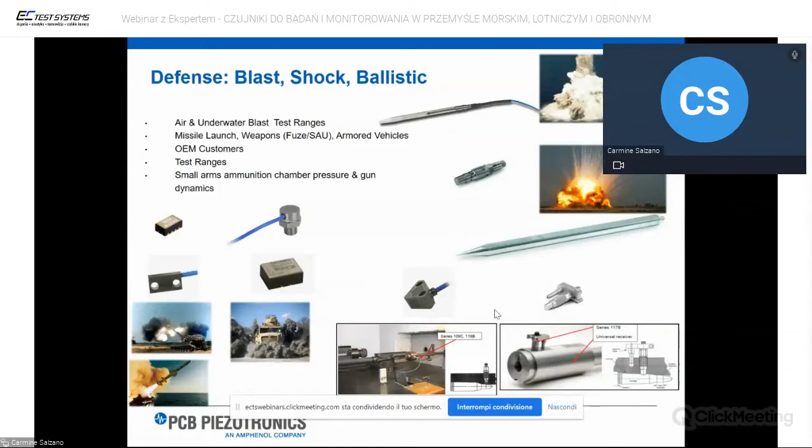Different applications in aerospace and defense. Today we'll focus on defense, especially underwater vibration and pressure sensor. In particular, defense shock applications are also related with shock and blast, where we use piezoresistive accelerometers for shock and pressure sensor also.

One of the parts of defense can be considered the Navy in terms of military vessels, but this is an overview of application that can be applicable also for civil naval vessels. We try to call them vessels in a very generic word because the application is very different, and I think we can divide into 2 parts: one sensor for testing, the other one sensor for monitoring.

The sensor for monitoring versus for testing is a very different application. Of course, these are just the applications we can serve with our sensor, not all types of application, as well as also the monitoring. These are a few monitoring applications we can serve with our sensor.

One particular application I would like to mention, because we will not treat it in the rest of the presentation, is comfort. Comfort is a typical test for passenger ships, like a large cruise ship, and acoustics are obviously one of the main parameters. But it's also important to note that some accelerometers for measurement on seats and breakers are useful for measuring the comfort or level of vibration.

That level of vibration could also be largely measured as motion, for instance the motion sickness typical of some people on ships. Also important for testing of ship behavior is slow motion. In fact, a test not listed here is a ship motion test or slow motion test.

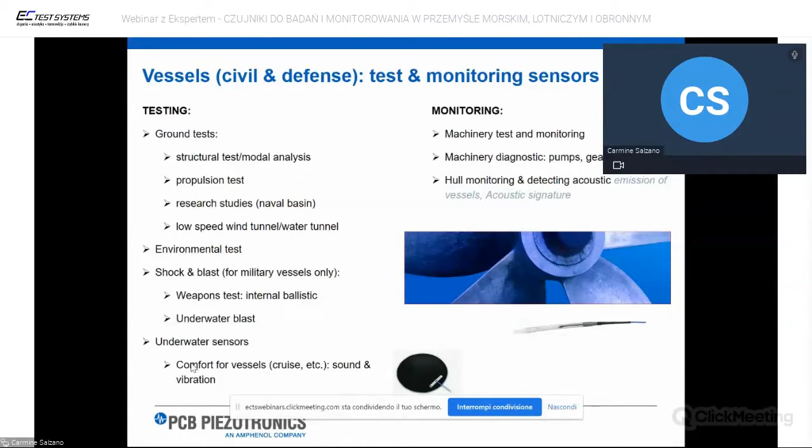In naval engineering, a ship motion test is a hydrodynamic test performed with a ship model for the purpose of designing a new vessel, for instance a ship, and improving the ship's performance at sea. These tests are performed in a dedicated basin.

One of the important key studies is acoustics, as already mentioned. Acoustics is an important field for ship design, both for commercial passenger and also for military use, because acoustic tests are very important, obviously, for comfort of passengers in a passenger ship. But for military use, it's important to maintain, to keep the stealth capability or invisibility.

Noise and vibration are also closely related to phenomena based on physics studies. Ship propulsion, in a global sense, is the most important source of noise, and the propeller, I would say, is the individual source of greatest influence of weight in the total. Outside propulsion, we can also mention generator and air conditioning as very important noise sources.

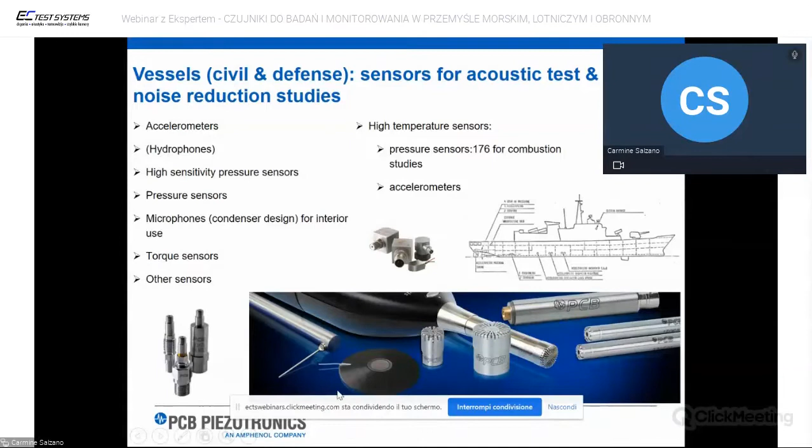Among other kinds of tests or sensors, we will see some tests for pressure sensors especially. You can see here some test sensors, from microphones to pressure sensors, which after all measure all vibration and acoustic phenomena, and accelerometers measuring vibration, of course, strictly phenomena. So for acoustics, it's needed not only to measure with microphones and pressure sensors, but also vibration.

For commercial and military applications, we need to keep the sound under control. A condenser precision microphone is the typical type of sensor used.

Finally, for deep water, everybody knows the hydrophones. Hydrophones so far are the only type of sensor not yet manufactured by PCB. But we have many other types of sensors for underwater use, even deep underwater - pressure sensors, accelerometers, and force sensors.

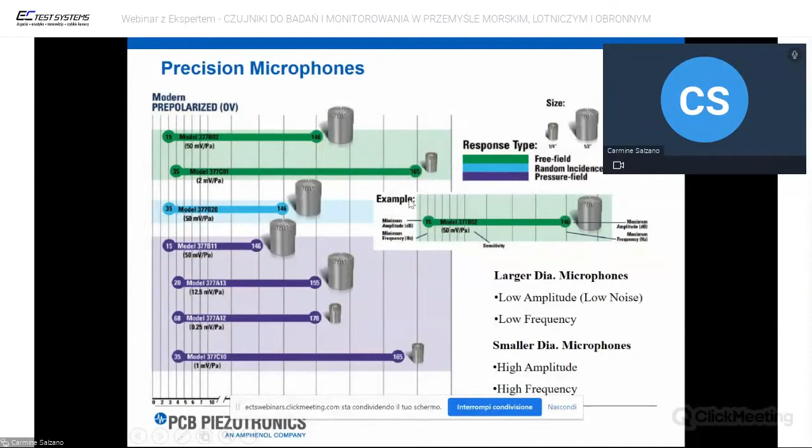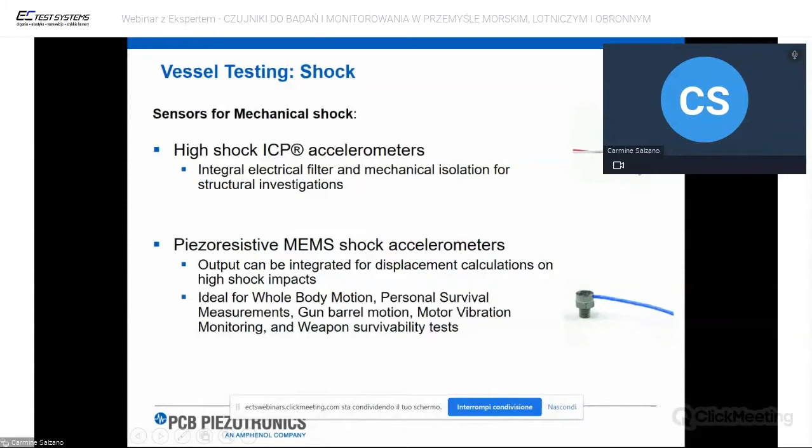Shock testing is another test which is not very common, but it's performed on military ships because sometimes you want to measure the strength of the vessel under impact - for instance, when hit by a torpedo or other close-vicinity offensive weapons. In this case, you want to measure the shock resistance of the vessel at different points. Here are two state-of-the-art technologies for shock testing up to 100,000 G or even 200,000 G, from PCB and Endevco.

Ship model testing basins play an important role in the basic design stage of a pre-built ship. A very large object like a floating ship can be made at smaller scale in order to predict behavior and study it in a model basin. We can have a hydrodynamic test facility or a water tunnel for experiments, and some tests include the propeller test, where we also want to check against cavitation.

We can see here a selection of dedicated pressure sensors for this application. In particular, you can see the 103M49 here for basin test applications, mounted flush, also a water-resistant sensor. This one is also a miniature sensor.

At the end, I will close the presentation and show all these sensors in my hand so you can see their size. These are two particular sensors - pressure sensors with current output, not ICP but current. This is something particular for very deep applications with high noise, where you need a current output to decrease the noise - completely different technology in terms of electrical board.

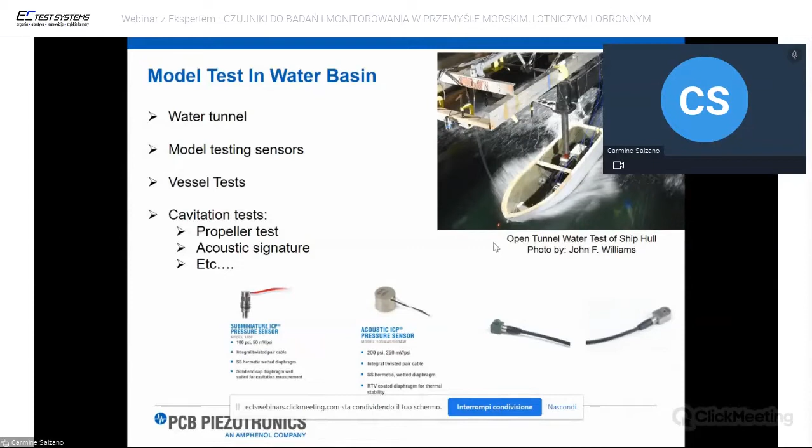These two sensors I found simply on the web, as part of dedicated papers, so you can easily find many applications on the web with our PCB pressure sensors. This one is the sensor I already mentioned, used for naval study, flush mounted, which can be exposed to water with just the sensitive area exposed. This sensor is also hermetic, completely welded, but remember, it's mounted flush.

And these are very important for both sensors for cavitation study. And these are also because these sensors are very high sensitivity, which means the range is a few PSI, almost the acoustic level, a little bit above. So very suitable in terms of frequency range and especially dynamic range of pressure to measure the purely dynamic pressure. This is also an important feature we need to clarify.

There are different types of technology on the market. In fact, PCB and Endevco can offer two types of technology. One is piezoelectric, like these two sensors, which is AC coupled, very robust, can be welded, can be underwater. The other one is piezoresistive, a particular sensor measuring static plus dynamic because they are DC coupled. On the contrary, the ICP piezoelectric are only AC coupled.

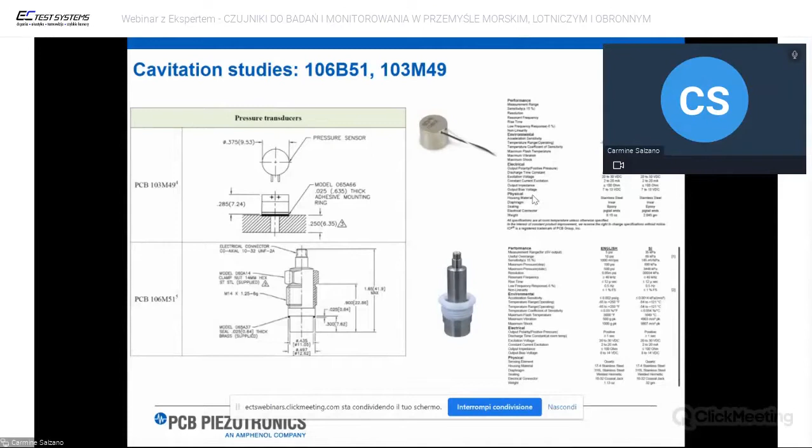Another application for naval studies, like any structure including airplanes, is the structural test. For structural tests, we are able to offer all types of sensor besides the data acquisition. Data acquisition is offered by Siemens Test, and they are completely compatible with all our sensors. In this case, for excitation we can use impact hammers or shakers, the response typically done with accelerometers, but also one particular sensor is a strain sensor.

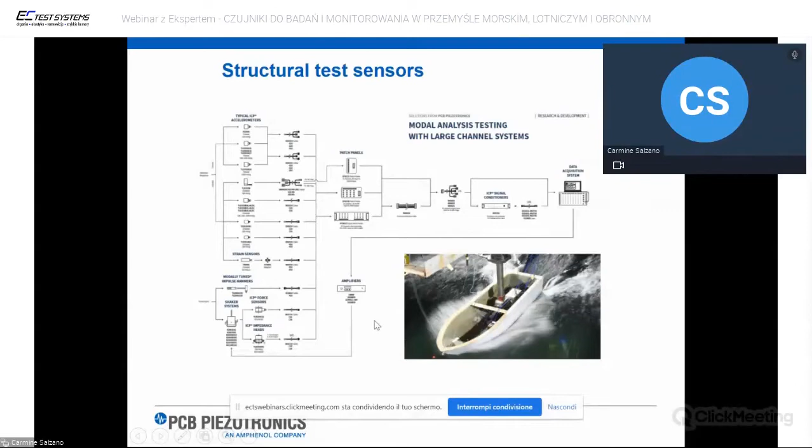And this is a unique sensor in the world. It's the only dynamic reusable strain sensor. Inside you have a quartz plate and a closed titanium housing. So this sensor is rather robust with ICP output, so you can use the same ICP input stage for strain sensors, accelerometers, pressure sensors, force sensors. It is the only reusable one because you can quickly mount it with cyanoacrylate and quickly dismount it with acetone, not like foil strain gauges like this one, which are permanently mounted.

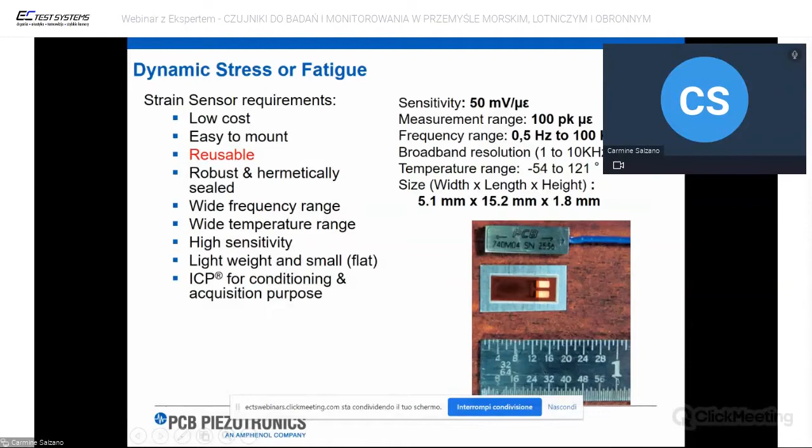The drawback, or if you want, the benefit of this sensor is that it is AC coupled, because it is ICP piezoelectric, which means it's able to measure very low, like 0.03 hertz or 0.5 hertz, up to 100 kilohertz, but not 0 hertz, not static strain, not static stress.

Okay, after this quick overview of different types of sensor for testing, let's continue the overview of sensors for measuring in the naval sector for monitoring, which are sensors permanently installed. So we can have sensors monitoring different machinery, pumps, engines, and so on. The main typical applications are for sure the diagnostics of pumps, gearboxes, and many other machinery. And the other application, I would say, is hull monitoring.

Hull monitoring is probably one of the most popular applications. For hull monitoring you don't need only pressure sensors, but you can also use hundreds of accelerometers spread all over the vessel. And this is also very important, because what is the question here? The question is that submarines, and vessels too, are noise sources. The noise is coming from many types of sources: machines on board, noise in the water, flow above the submarine, engine, propeller, as already mentioned, and so on.

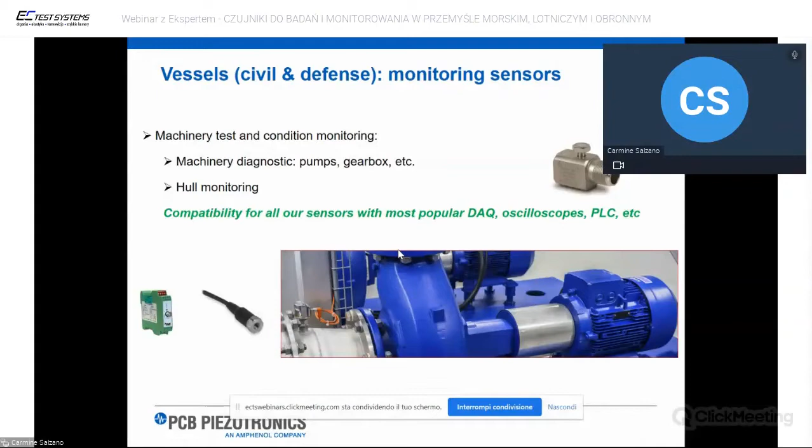So the method of detection and identification of noise sources uses acoustics, so pressure sensors, but also especially vibration, not only the measuring of cavitation. Think about the submarine like a big city making a lot of noise. The goal is to keep noise down. In order to keep noise down, we need to measure this noise, not only with high sensitivity pressure sensors, but also with accelerometers. And in terms of accelerometers, we have many types, as I already mentioned, and we will see some hydro tested.

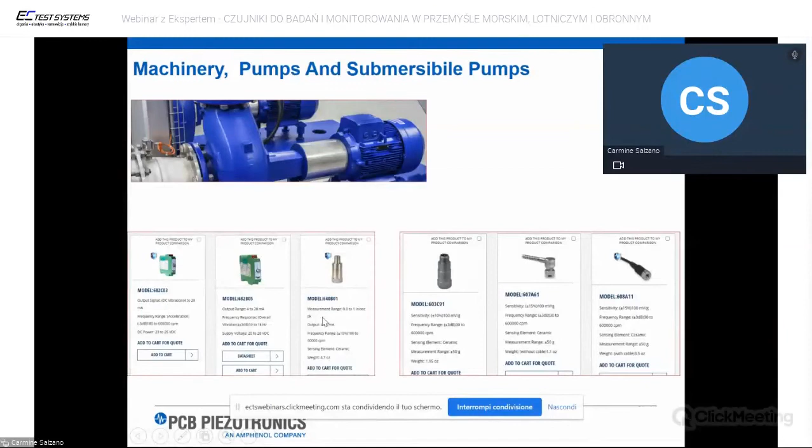Here, for pumps and submersible pumps, we can have some particular sensors, like the sensors for permanently monitoring in a very easy way the bearing on the bearing support, but also for pumps, and also underwater sensors. Now we go back to hull monitoring for a minute; I already mentioned that hull monitoring is very important. You can see some of the sensors here.

Here is a particular case of the sensor for bearing fault detection. However, the other application, hull monitoring, can use this kind of sensor. This sensor, like this one, is a 355M73.

This is an accelerometer which is case isolated, so completely hermetic and also electrically case isolated, so insensitive to any noise. This sensor is hydro tested up to 600 psi, so you can imagine the depth where it can work; it can be mounted very deep and work perfectly without any leakage, any problem.

The other sensor for pressure, also hydro tested, is this sensor, but this sensor is a current output, as I mentioned to you. It's still piezoelectric, but the current output means you need a different kind of conditioning. This sensor has, for instance, 50 microampere in terms of output range, and we can use also many other

types of sensor. Typically, for a vibration sensor, the maximum frequency is like 20 kilohertz. It's not like a pressure sensor, where we measure up to 1 megahertz. Mechanical vibration is limited in frequency, and there is an excellent paper which maybe you can ask EC Test to send you. It's on our website, where Professor Pat Walter explains why it's not needed to

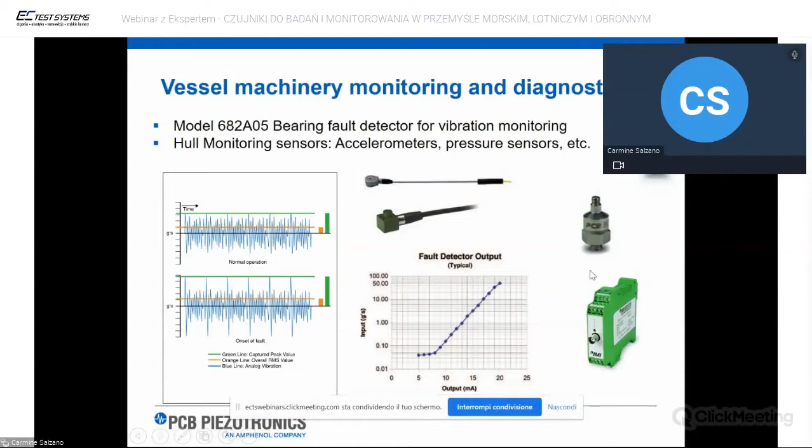Speaking about monitoring, the last slides I would like to share with you are regarding engines for naval. This is a frigate program, where inside we have the engine permanently monitored with these two types of sensor. Two accelerometers. One is a generic, very popular 628F01 for any part of the engine, different points.

And for the combustion chamber, very hot areas, we have this accelerometer, which is also differentially isolated, of course, with resistance up to 700 degrees Celsius. So this sensor can work in a very hot area, in the hot part of the engine. These two sensors, for many years now, are permanently monitoring this type of engine mounted on this kind of frigate class.

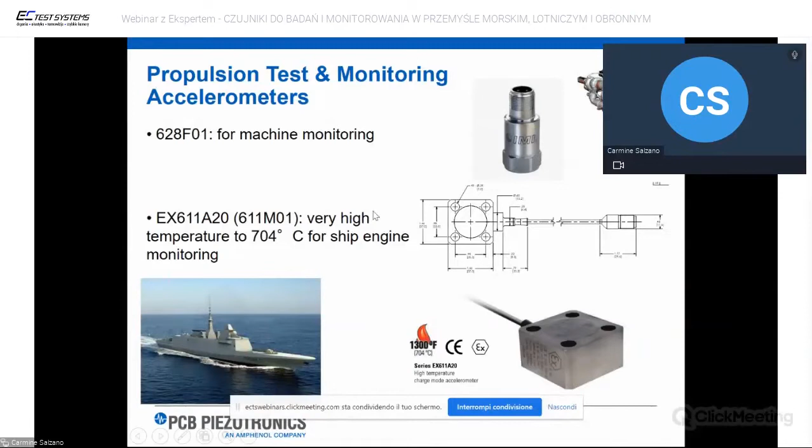And of course, we also need to mention all the pressure sensors with a particular crystal we developed, which is part of a dedicated seminar, UHT crystal, which gives excellent performance in very hot areas, especially when the temperature variation is a lot during the measurements. These are all pressure sensors, different shapes, all with very high temperature resistance.

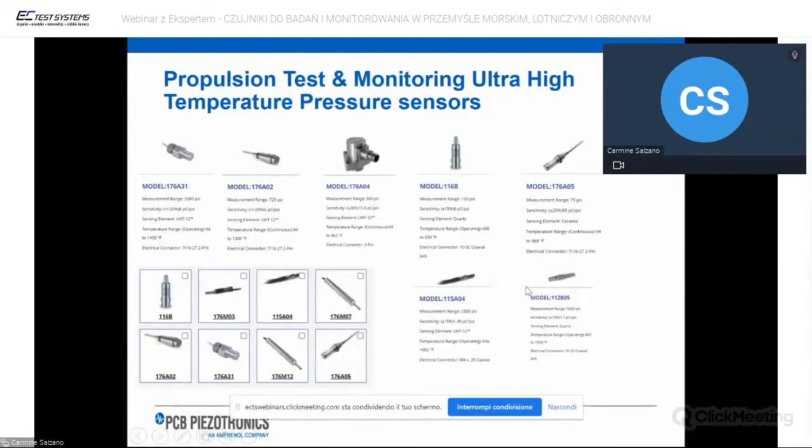Now the second part will look at specific technology for deep underwater test. So we mentioned sensors for inside the vessel, for mounting outside the vessel and surface. Now we will see the sensor underwater concept. And the concept of underwater is that water is only one of the many parameters affecting the sensor. You can see here an accelerometer, and the input you're going to measure is not exactly the output, because it's affected by different environmental factors.

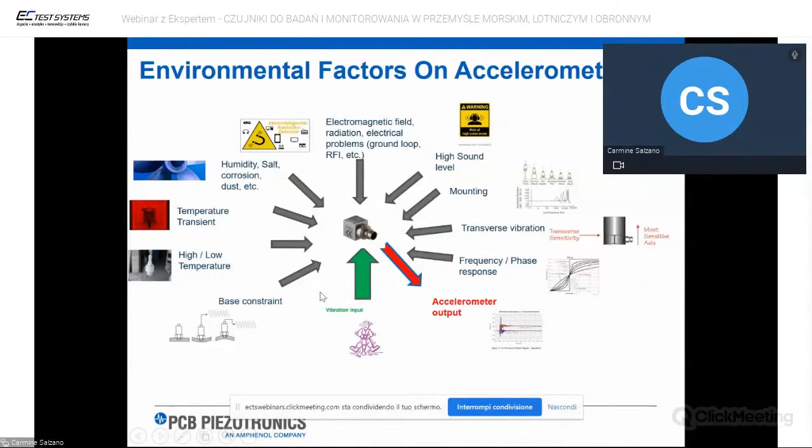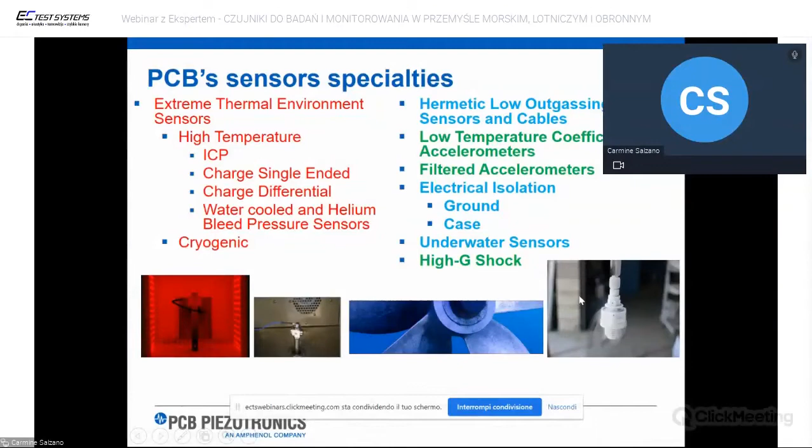I don't have time to go through all these parameters because you can read them yourself, and I cannot speak for more than 1 hour here. Therefore, I just mention that humidity of water is only one affecting the performance. So we need to concentrate now on how we can deal with the water problems in a sensor. To deal with all these parameters, we developed dedicated technology for cryogenic or high temperature or underwater and so on.

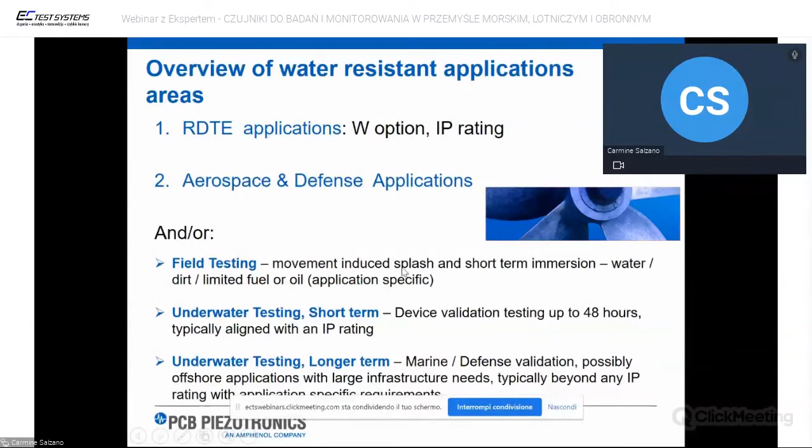For water resistance, we can divide into two types of application and therefore two types of technology. The first one for general test, not for deep underwater, for any type of test in automotive, in test and measurement, even naval study. And the W option, which is water resistant, or IP rating for accelerometer. The other application is aerospace and defense, so deep in the water. These are the two types we will see in this part of the presentation.

So the first part is related to general water resistance, not for deep underwater, not for underwater, but just for water splash, this kind of stuff. In this case, we have two technologies, as I mentioned to you. The first one is the W option, the other one is IP68.

The W option is just a matter of making a suitable O-ring here to provide resistance against water splash. And most of the applications are this way, which means some water splash can go inside the connector and cable and affect the measurement, even in a welded, hermetic accelerometer. Therefore, the weak part is this one.

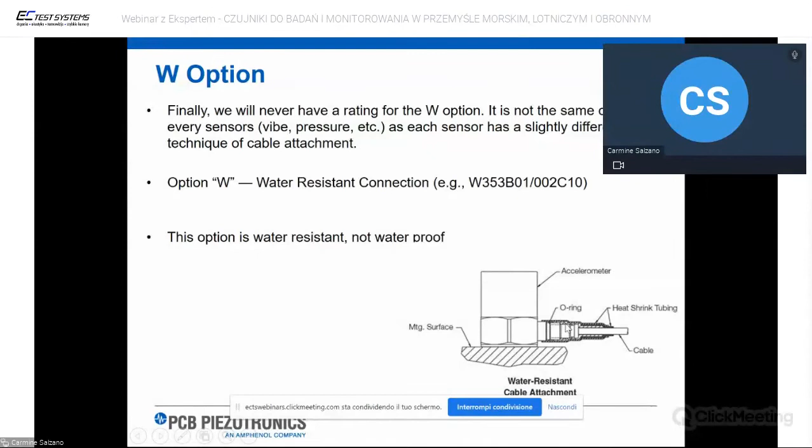And we can protect with a sort of silicone or O-ring and so on. And we can call this option water resistance. The next step for accelerometers especially is IP68. So for any accelerometer which is welded, the problem can be the connector.

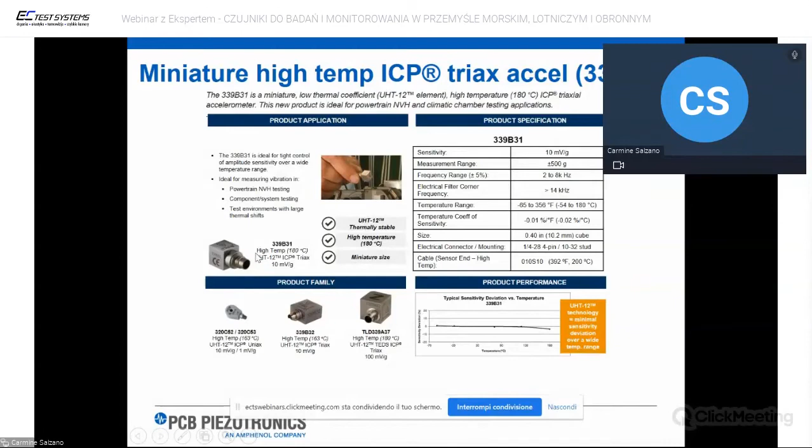But we made a particular glass-to-metal bond connector, and we also made the hermetic connector with the relative cable. So in this case, we have a complete line of IP68 accelerometers. One example is this one: these are triaxial miniature accelerometers with the hermetic connector, completely welded, and the connector is also hermetic. Another example is this case-isolated one, with the same type of hermetic connector.

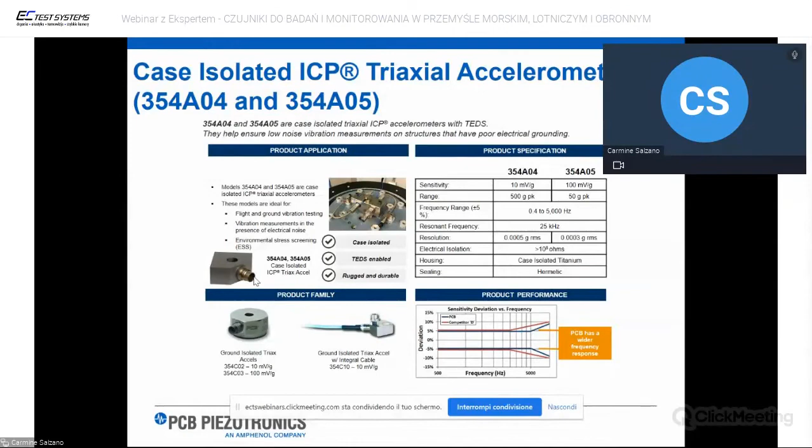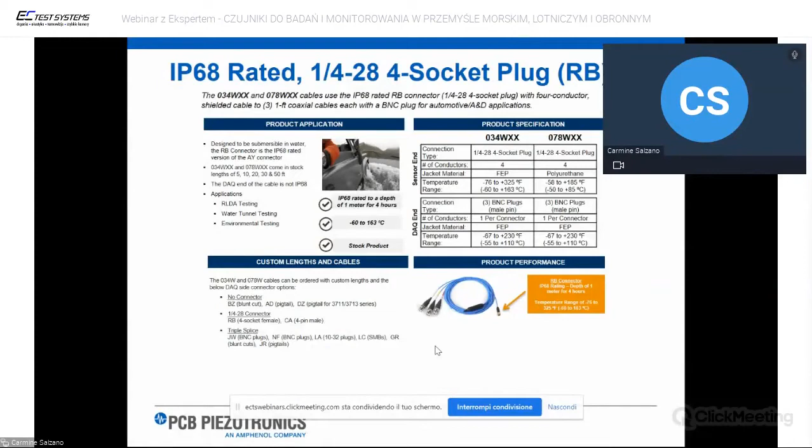But now the question is, yes, the sensor is welded, the connector is hermetic. What about the relative cable in order to get IP68 certification? Well, this is the cable. It's a 4-pin connector cable because we are speaking about triaxial, and the whole line, accelerometer, connector, and cable, is IP68, which means you can use it at 1 meter for 4 hours. So this is the second step after water resistance.

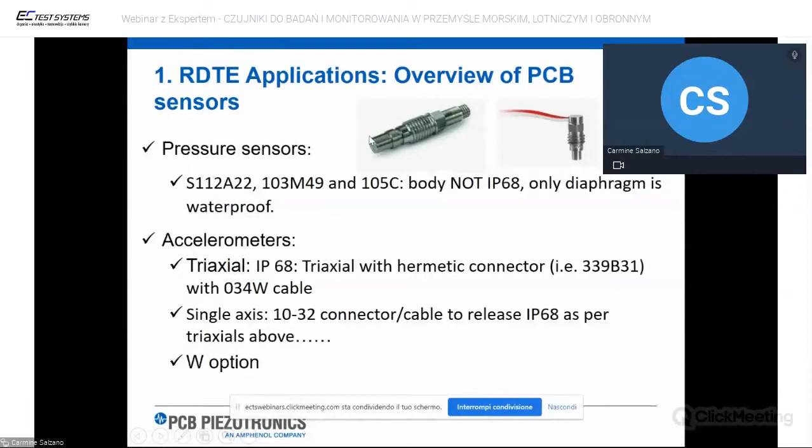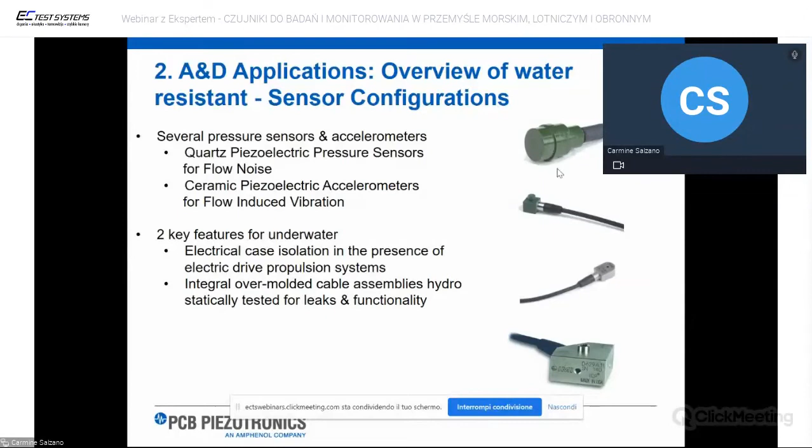So it can resist water and can be submerged, not very deep, and only when the diaphragm is flush mounted. Then the second part: now we see when we want the whole sensor deep underwater, the complete pressure sensor or accelerometer completely underwater. In this case, we can test the sensor, and we also make another kind of test, a leak test, which we also perform in production for space and satellite applications.

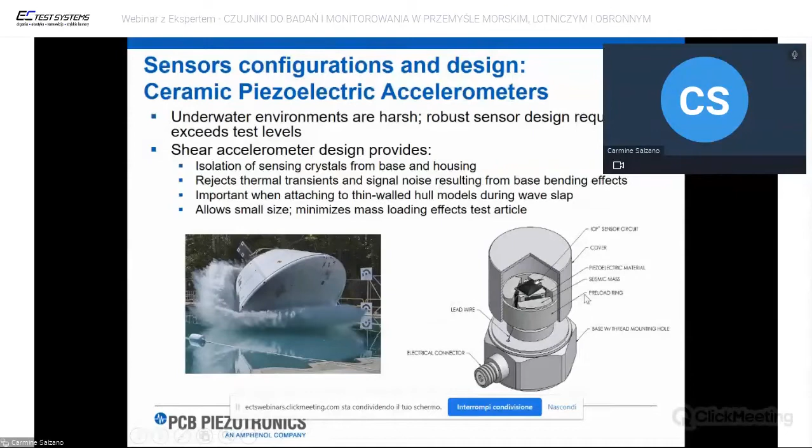Well, first of all, we need to understand a little bit the design of the accelerometer. The basic core of the accelerometer is the crystal stack with the electrodes, the seismic mass, and the clamping ring. So it's a very robust design, especially in shear mode. And this can be welded, so the sensor is completely hermetic and insensitive to changes in temperature, especially when you use quartz.

Now, let's see how we test the sensor. First of all, the leak test. This is a gross test to check leakage up to 10^-3 cc per second. We put it in an oven at 100 degrees Celsius, with fluorinert inside. And we can see by eye the drops coming out of the sensor. If drops come out, of course, the test is failed. But this is a gross test.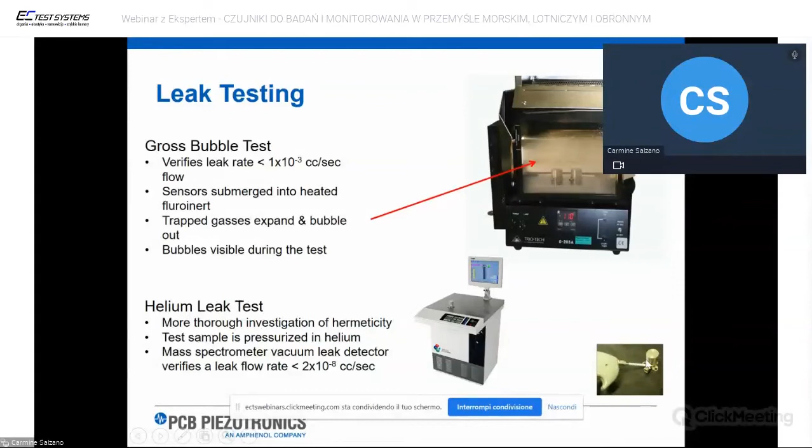For a finer test, we use the helium leak test. We put the sensor inside a mass spectrometer and pressurize it with helium. In this way we are able to verify up to 10^-8 cc per second, so a very deep test for hermeticity of sensor and connector. And of course, we have a third case, a sniffing test, where we have an electronic nose to sniff around the sensor and connector to check for any problem.

The other problem, of course, is the cable. Cable is very important, and in order to prevent axial flow of water if the cable outer sheath is cut, there are various degrees of acceptance tests that can be performed on the cable to find the effectiveness of the water blocking compound according to standard. You can see the water blocking.

Another reason, not only the water inlet, is that it's important to provide the crush resistance required to work, especially at the specified depth. So two reasons for this design of water blocking in the cable. And of course, the material, for thermosetting material, should be useful to be attached to the rest of the body of the sensor.

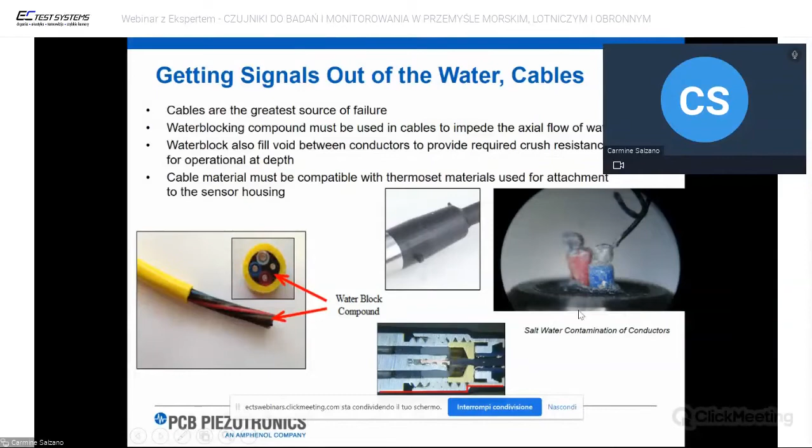Here we can see some poor cable connection, typically in the form of intermittent bias voltage of the sensor: 0 volts, of course, is shorted; 30 volts is open circuit. And here we can see the contamination by salt water on the conductor. So it's important to pay attention to the water for underwater use.

Finally, the last test we perform is the most demanding, the hydro test. Hydro testing is very important to ensure successful performance at operating depth. This test verifies the water block cable and the sensor, including wiring for overmolded. The sensor, which we call unit under test, we put inside this vessel here, this hydraulic pipe, and then we fill it with water.

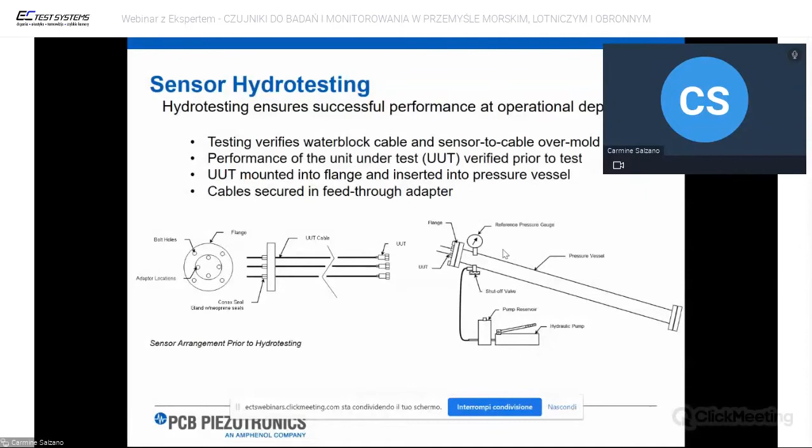We wait and stabilize the temperature, of course, and then we slowly increase the pressure through the flange until the desired pressure, for instance 300 psi or 600 psi. And during this process, we also monitor the bias voltage, the capacitance, and the continuity. So in this way, we hydro test our sensor.

And now, finally, we can see examples of hydro tested sensors tested in this way. First of all, a pressure sensor for rapid fluctuation. It can be used not only for cavitation, but also for deep underwater. And the sensitivity is rather high. You can see 50 psi for this sensor, which is hydro tested to 600 psi. And it's also a miniature sensor.

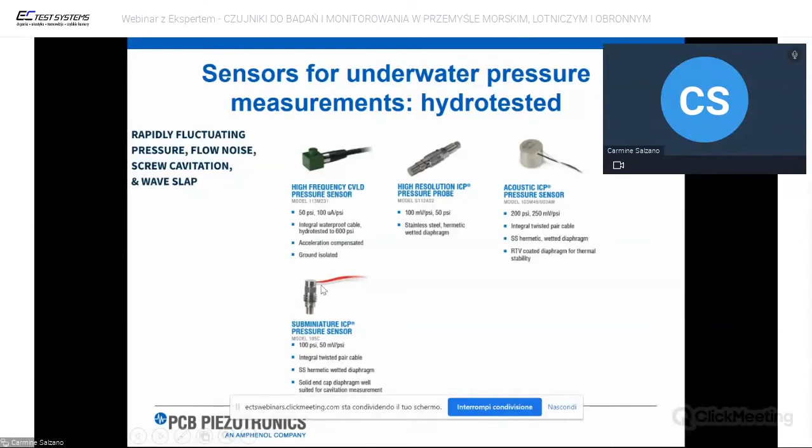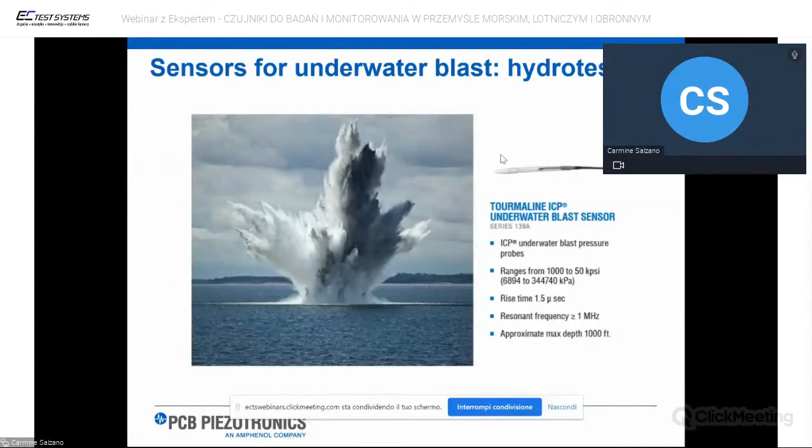Okay, I finished my presentation, and I would like to just conclude by opening. I think everything's fine, right? Okay, it's an excellent presentation. Thank you.

Okay, I would like to show you the sensors which I mentioned. I hope you can see the camera in a big way. I don't know. Let me close sharing so you can see my camera better. This, I hope you can see, right?

This is the flat microphone, with a little water resistance. You can mount this sensor flat on any surface. If this is the surface, you can mount it this way. You can just glue it quickly with double-sided tape, and you can measure the pressure, and especially the sound, on a surface.